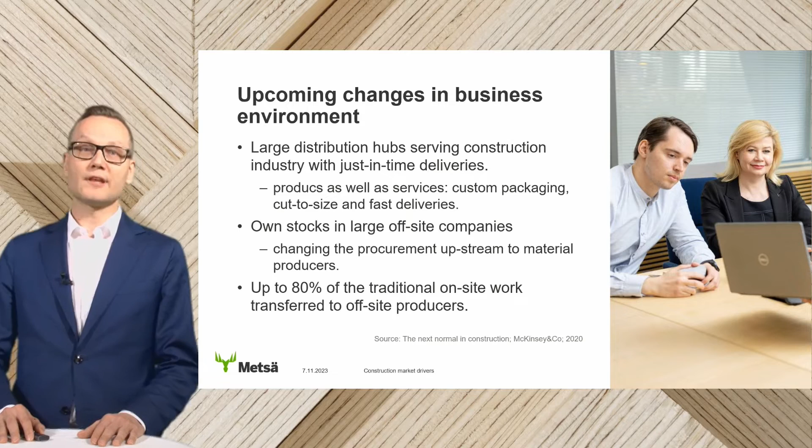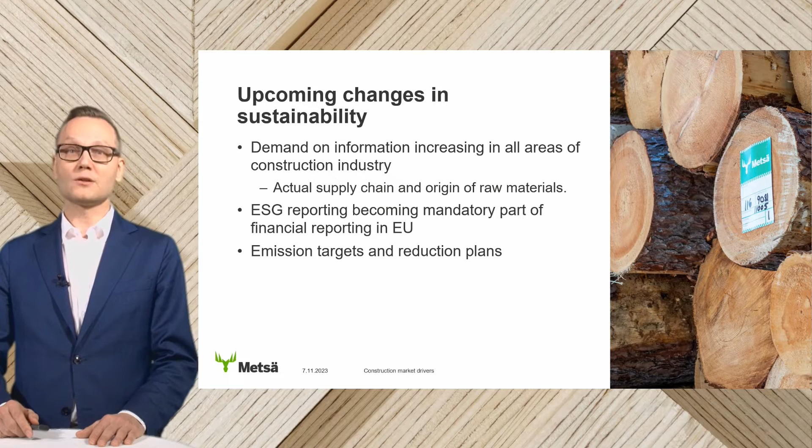The final topic, also visible on the market, is related to countries, municipalities, and companies setting emission targets, seeking to reduce their emissions. For example, I was at an event in Sweden where we discussed this topic, and the presenter said that depending on which year you start production, the limit of emissions per square meter is also decreasing or declining per year. So it's definitely something to keep a close eye on in the business front.

And I also know that my colleagues are presenting topics that help you look into this topic in more detail in today's event.

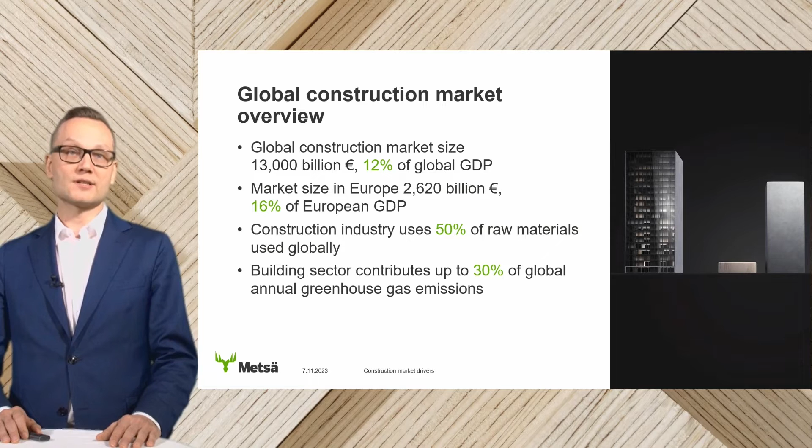And the final one here, which I want to take as a global comment, is related to greenhouse gas emissions. So construction industry contributes about one third of the global emissions, and again, that's a big amount. Of course, there are plans and targets to reduce this. Putting that in numbers, roughly two thirds of the emissions are related to heating, cooling and such energy usage, and one third is related to construction materials.

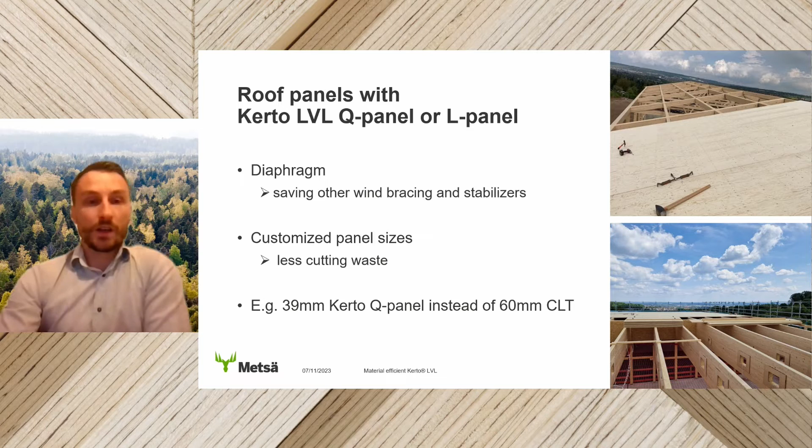On the one hand, saving, for example, wind bracing or stabilizers that you normally need, no matter if it's steel or glulam. Then, as I said, you have less cutting waste due to customized panel sizes. And thinking about using a Kerto Q or L panel instead of a thicker CLT, you might end up in this example with 39 millimeters compared to 60 millimeters CLT, with a material saving of 35%.

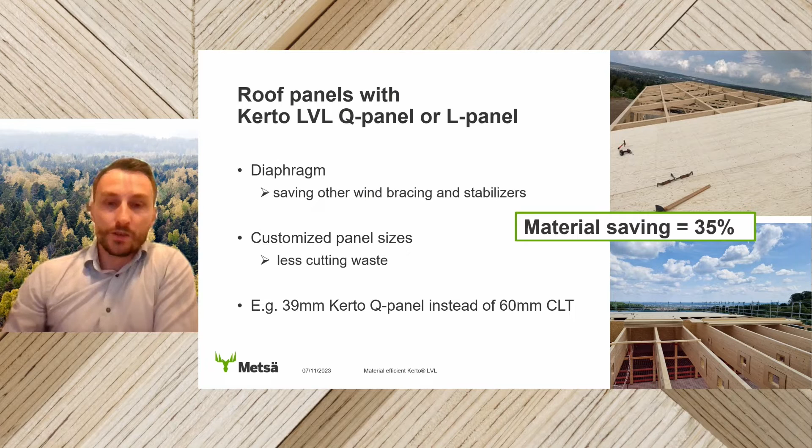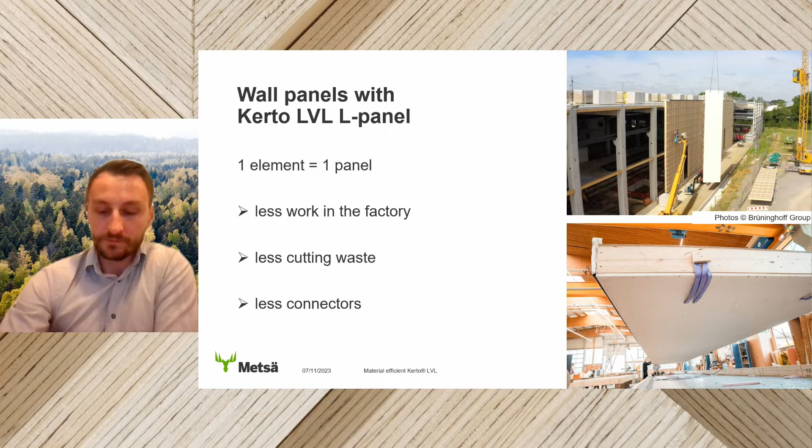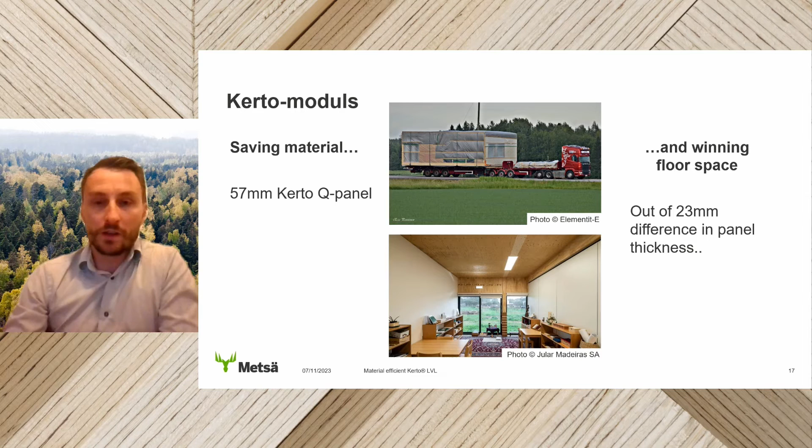Now going a bit more in detail with one example. Thinking about a Kerto module made of 57mm Kerto Q instead of an 80mm CLT, you're going to save 23mm on each side. So you not only save material, but the investor will also win some floor space, only 23mm per panel, but this could end in a significant amount.

On the one hand, you have a material saving of 29%, and on the other hand, assuming a module of, for example, 3 by 8 meters, you'll end up with roughly 1,500 euros added value per module, which might be a significant added value for the investor, depending on the sellable price and so on.

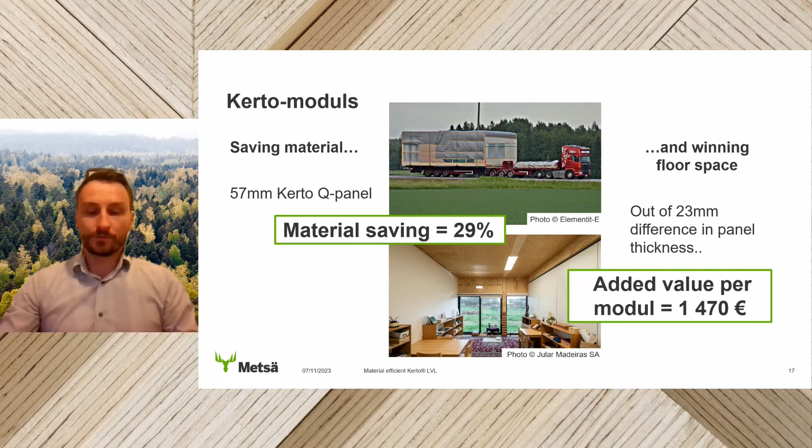So what about floors? Kerto can be used in floors in different ways. It can be used as a rib element, no matter if it's an open box element, a box element, or a rib element, the normal way and upside down. Or you can use it in combination with other materials like a glulam beam or something else.

We have the Kerto S-beams, 45mm wide, with Kerto Q panels on top and bottom, everything glued together, and Kerto Q panels of 45mm as well. So we ended up with 240mm in total as well, same height, same mechanical properties, and one big advantage regarding sound protection.

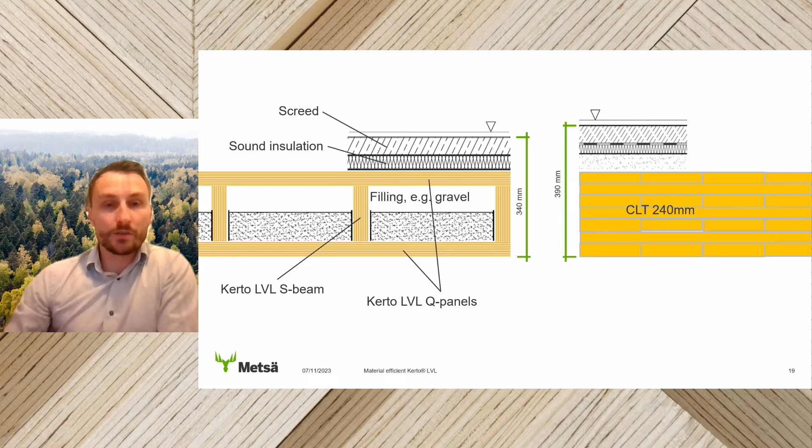So in this comparison, with 45mm Q panels and S-beams, this results in a material saving of 55%. It could be even more if we optimize the box element a bit more.

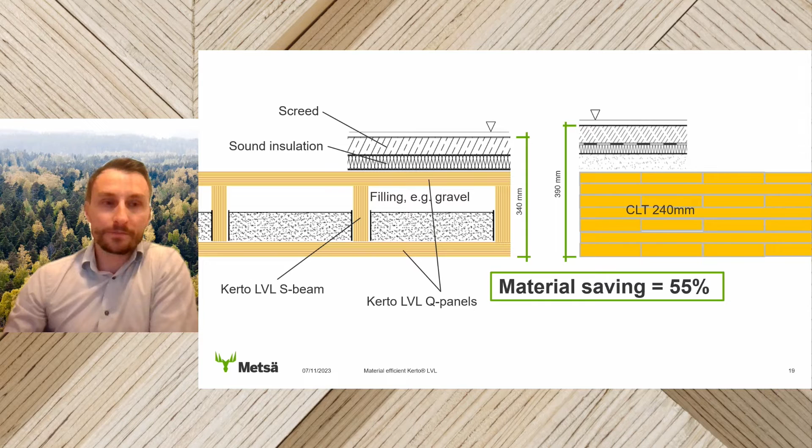So related to the floor, the connection to the wall is that lintel. I have a few examples here. But first starting with the most common solution, that massive one: we have a timber frame wall, we have a glulam beam on top as part of the bottom chord or upper chord, and then we put the timber floor on top of that timber frame wall, and on top of the timber floor is the next timber frame wall again.

This works in some applications, but often there are different questions regarding building physics, like what about the dew point, what about vapor barriers, thermal bridges, what about room high windows, what about settling, especially on higher buildings, or if you have a plastered outer wall. How is the load transfer going on? What about roller shutter boxes? And finally, what about resource efficiency?

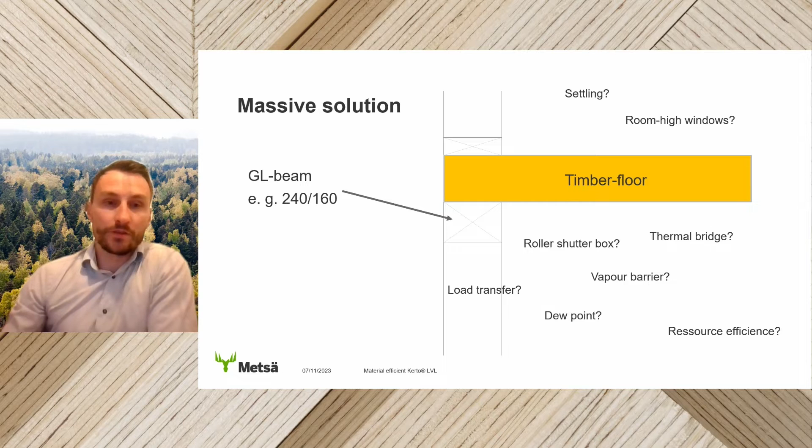So the big question is, why not use a Kerto LVL beam, like that clever guy from VVR does? It could be, for example, in 39, 45, 51mm, depending on the geometry of the wall and the structural requirements.

So here I will show you a couple of examples just to give you some inspiration how to use the Kerto beam without thinking too much about building physics, space in the wall for insulation, roller shutter box, and stuff like that.

So the first one is a simple beam, like you have it on the picture, and you can connect the beam shoe there, place your beams in the beam shoes, and it's done. Pretty simple.

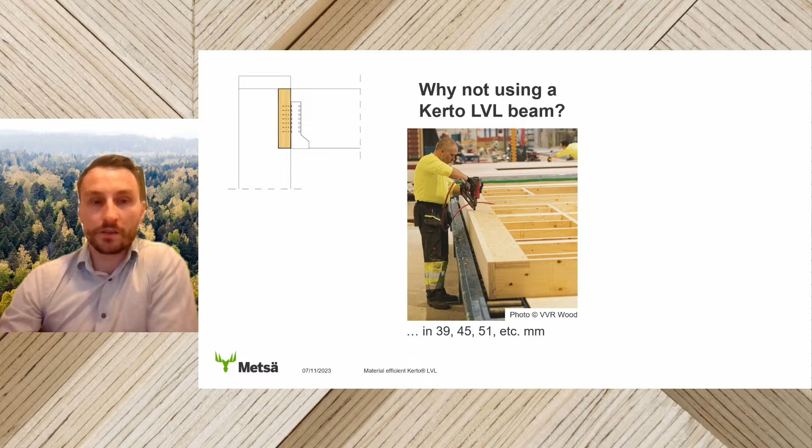The next one is a bit different. The idea here was to avoid cutting the studs, so we placed the Kerto beam in the installation layer, and that way we avoided the cutting. In this example, we used a metallic dovetail, so a Sherpa or HVP, you name it. This is an inspiration for this one.

Then the next one is that L detail, which maybe is known by you as well. Pretty simple to place the floor, and that's everything I want to say here. Sebastian will talk about that detail more in the next presentation. So pretty exciting what he's going to present.

Then last but not least, we have the normal dovetail connection. In this example, we thought about an element made of beams with one end beam, and the connection between the main beam and the end beam is with a dovetail. Then you screw that element to the beam that is implemented in the wall, so the lintel there.

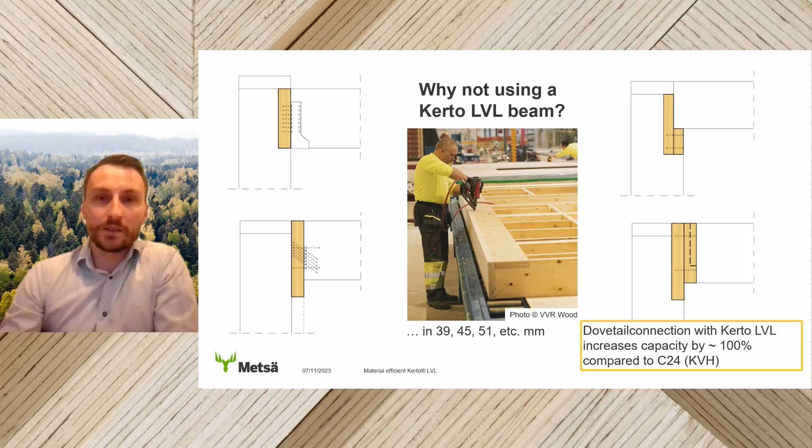What I find quite impressive as a side note is that comparing the capacity of C24 with Kerto LVL, you can double the capacity of the dovetail just by using Kerto. And comparing those now with the glulam beam I just showed before, so same mechanical properties again, just a bit thinner, you can end up with material savings of up to 65%, so 2/3 of the material just saved by this one, with a lot of advantages.

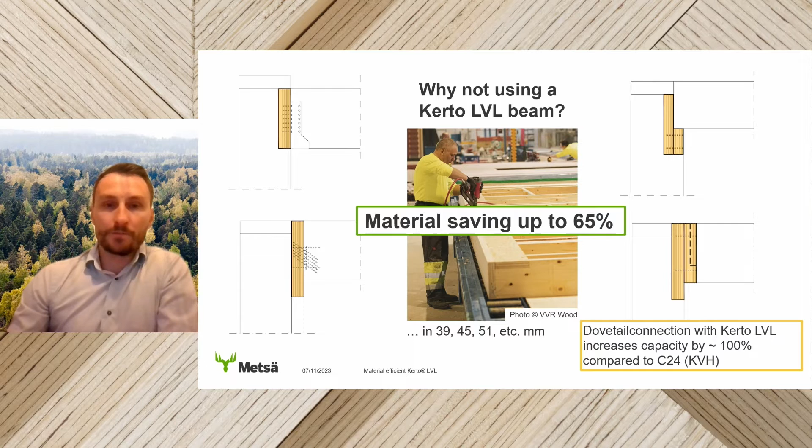So what about cut to length? That's one service we offer. Cut to length means we deliver the length you want to have. So if you want to have 3.58 meters or 8.20 meters or 11.12 meters, we will deliver this to you. So you don't need to cut it in your production facility. You can send it directly to the construction site, for example, or just use it in your prefabrication process.

And so we save material on two sides. On one side we save material in our production, because we have an endless production and we have almost no cutting waste in the production itself. And due to that cut to length delivery to your site, you will end up with no or very little cutting waste in the carpentry as well.

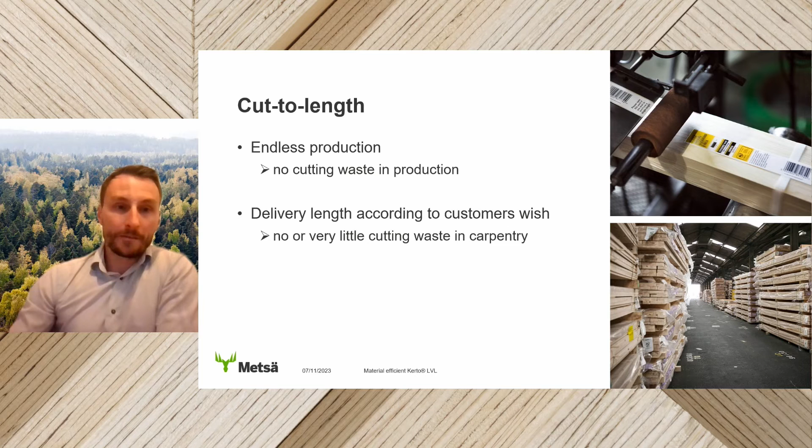So coming now to a quick summary of what I just showed you. On the one hand, you can save timber, like I've shown in some examples now, just by using thinner material, or using the material in a smarter, more efficient way. You can save supporting structure, like in that roof example. You can save connectors by using big size panels, so not tons of joints between the elements or between the panels, the cladding.

You save cutting waste, which might be, depending on the product, or if it's glulam or CLT or whatever, quickly 5, 10 or even more percent. And you avoid headaches about building physics. And finally, using big-sized panels in element production, you save a lot of work, of course, as well.

On the other hand, you will win space in the elements for insulation, roller shutter boxes, any other blind systems. You can win floor space, thinking about thinner walls, and with the size of the elements, you can win safety and speed on site and off site. So on site, especially thinking about closing the roof very quickly by using bigger elements, so less issues with rain or something like that.

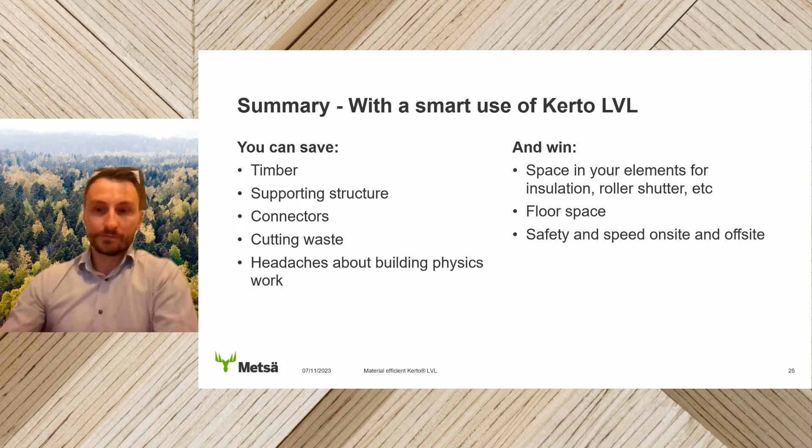A final word I want to say is, we're having a very, very precious material called wood, and I think it's very important for all of us that we don't waste it carelessly by using massive wood members just because it might be a bit easier in the beginning. So let's build more with less.

Thank you, Niels, especially for these last clever and inspiring words. I've been amazed by your presentation, especially the exceptional material saving in line with your last words - so up to 30, 50%, 65% in some cases.

Thank you for having very well spotted these material saving gains and benefits. We had a question in the chat about the standard dimensions. So for these lintels, are there any standard depth or height for these beams? The thickness you mentioned was about 45, 51, 57, but what about the height of the beam?

We have standard dimensions, not for the lintel itself. We have some standard dimensions that we offer on the stock, or from stock, and we have pre-dimensioning tables for the lintel. So both, we can offer to send them to you, whoever made that question or whoever asked.

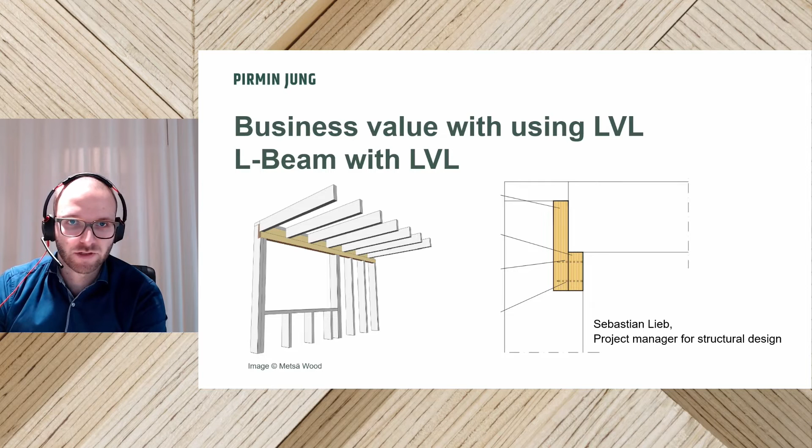So my name is Sebastian Lieb. I'm a skilled cabinet maker and timber engineer, and now I'm working as a timber construction engineer at Pirmin Jung in Switzerland. And as a project manager for structural design, I have already planned a wide range of buildings, from multi-story residential buildings to big structural halls.

Pirmin Jung itself is a planning office with several locations in Switzerland and Germany. We plan and accompany timber buildings in the areas of structural design, building physics, fire protection, sustainability, and reuse.

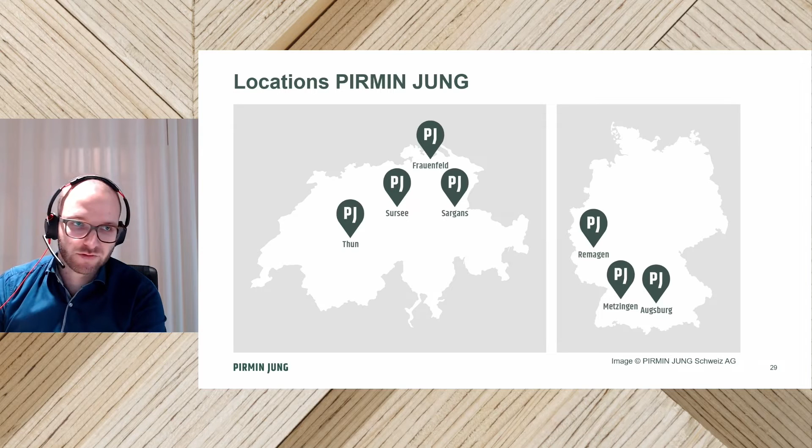First, I would like to show you some advantages of the L-beam detail.

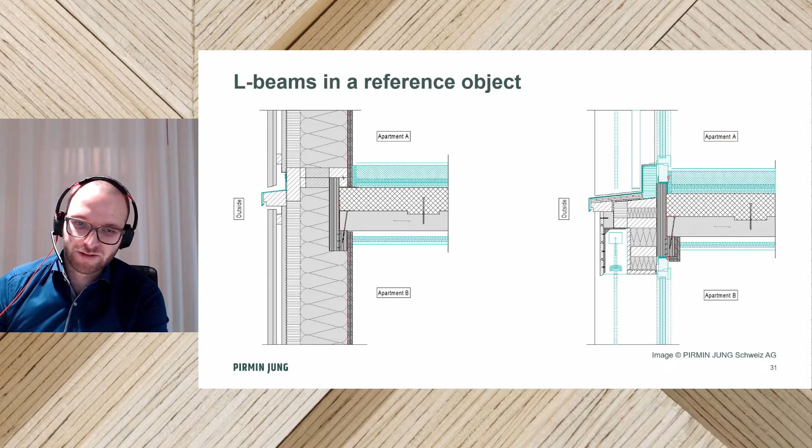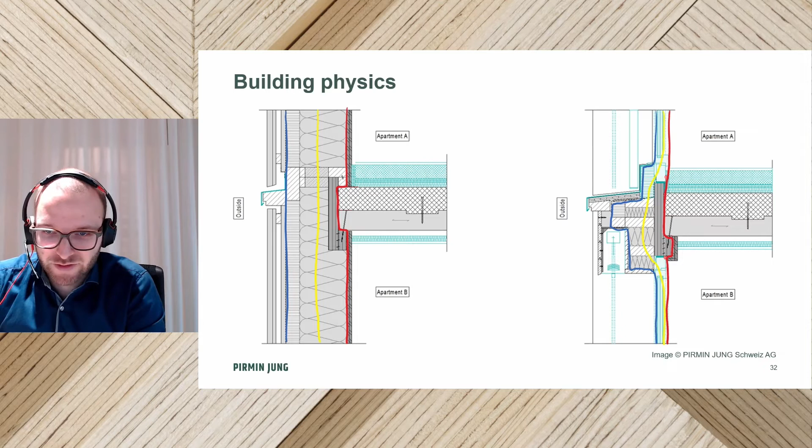Depending on the wall thickness, the roller shutter box can be integrated relatively easily in the wall. Depending on the window position and the architectural wishes, the position in the wall can shift, as you see in these two examples above. The lintel height above the window can also be significantly reduced compared to a conventional beam.

Of course, the beam height depends on the span and the load from the ceiling. The size of the L-beam therefore varies depending on the project. With these measures, the architectural wishes can usually be taken into account.

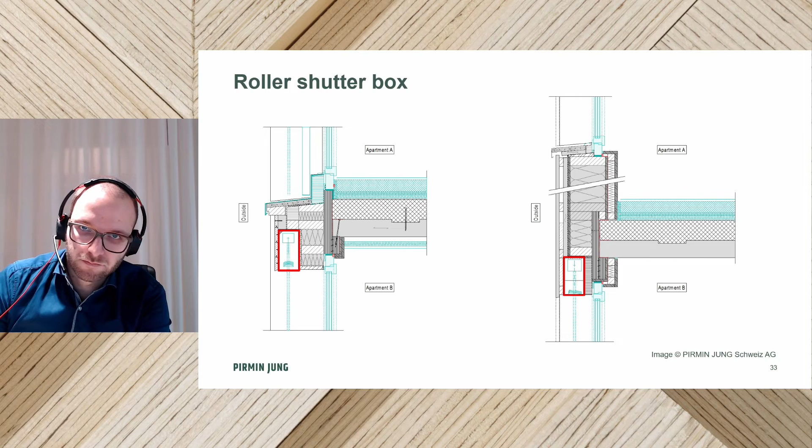When an L-beam is installed, the column only needs to be notched locally. This helps the columns to be placed on top of each other with a pin. The columns stand directly on top of each other, and cross-wood can be reduced with this system.

Reducing cross-wood is particularly important for tall buildings in order to reduce settlements.

The load from the L-beam can be transferred into the column via contact. The high strength of Kerto helps to reduce the width of the supports. Since Kerto also contains transverse layers, it is the optimal material to withstand the transverse pull in the web and the L-beam.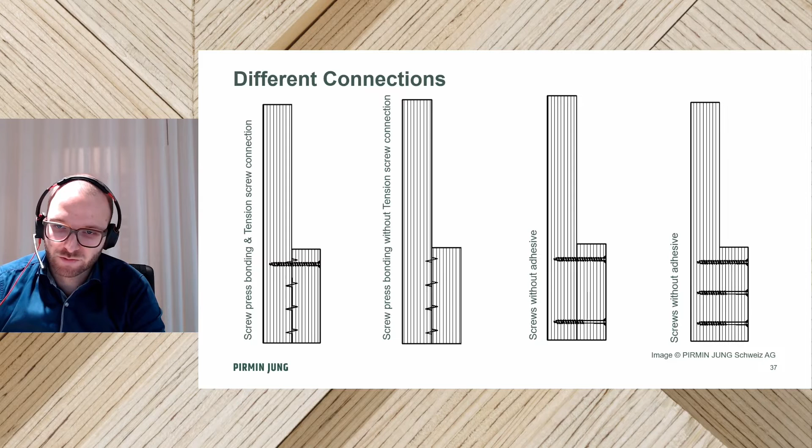In the second series of tests, we omitted the cross tension screws and only connected with screw press adhesive. In the last two series, on the right side, we connected the web and the bar with a different number of screws without any glue.

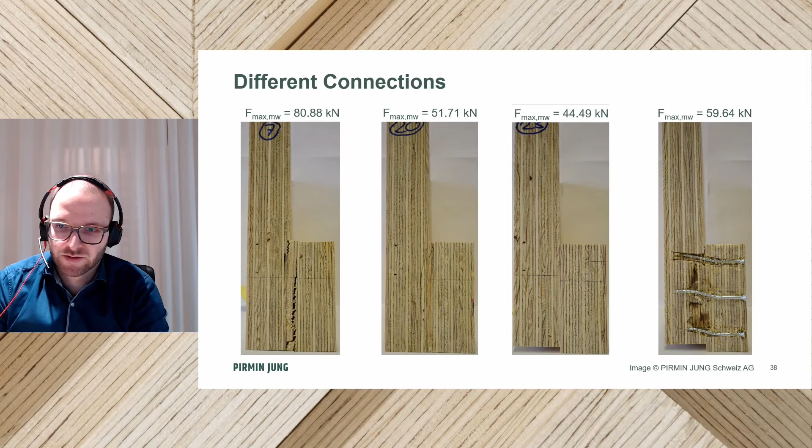The test specimens were driven until they broke. You can see the results in the four pictures. The beam with screw press bonding and transverse tension screws delivered very high strength values and failed in the wood cross sections. The second beam with screw press bonding and without transverse tension screws failed in the joint due to transverse tension and achieved significantly lower strength values. The screwed L-beams on the right hand side also took a significantly lower load, resulting in large deformation between the web and the bar.

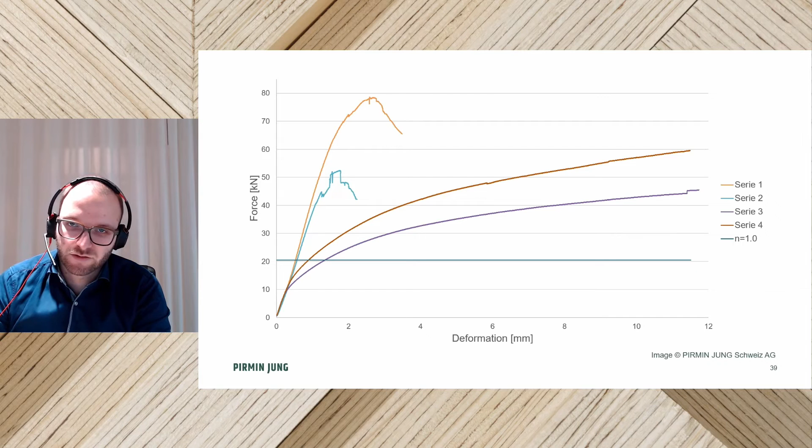I can explain to you why the transverse tension reinforcement has such a big influence with the following pictures. With our L-beam, the support force acts eccentrically on the beam, which results in an offset moment on the beam.

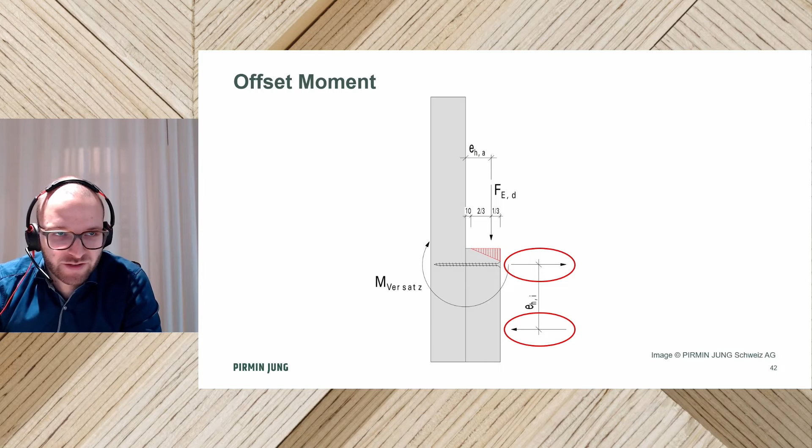The displacement moment can be divided into tensile and compressive forces. Since wood cannot absorb large transverse forces, the tensile force must be reinforced in the cross section with fully threaded screws in the upper part of the support bar.

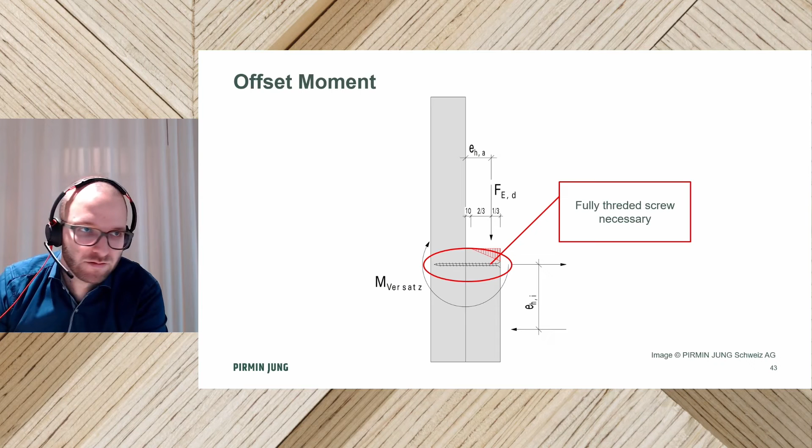In Switzerland, we usually use press bonding with fully threaded screws in our L-beams to achieve the maximum strength. In Germany, not every woodworker can carry out screw press bonding, so sometimes only screws are used in this L detail, but then the additional deformation must be taken into account in the structural concept.

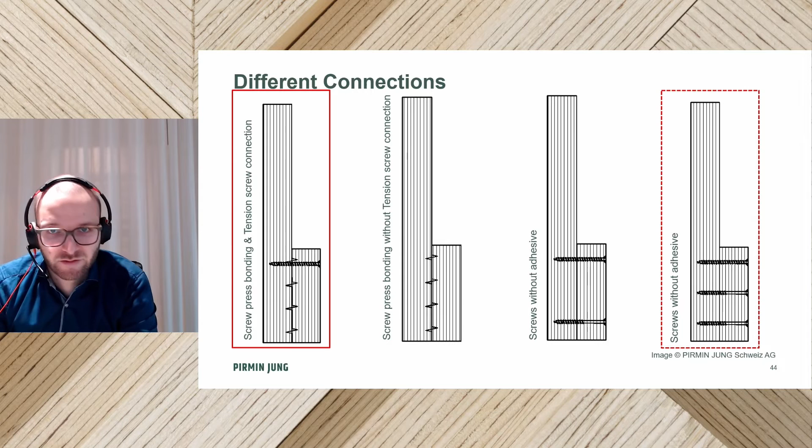Test results before showed that an L-beam without transverse tension reinforcement is not recommended from our side. In summary, the L-beam helps us create a slim and efficient load-bearing structure and meet the high requirements in modern buildings. With Kerto Q, we have the optimal material to create these L-beams.

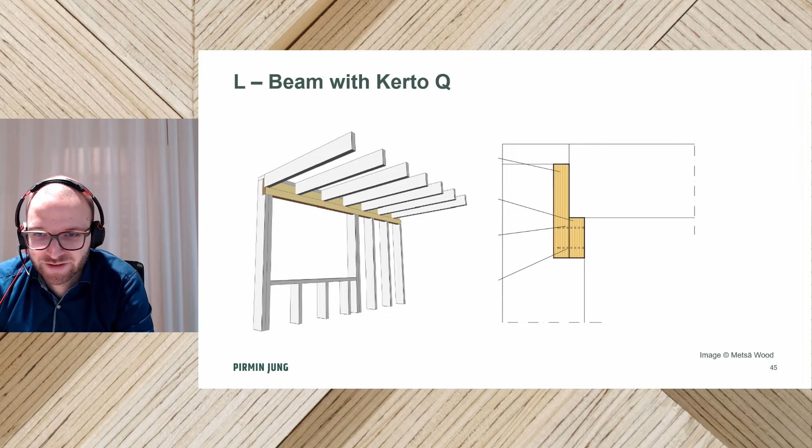I hope you were able to take some new aspects away from this presentation, and thank you for your attention.

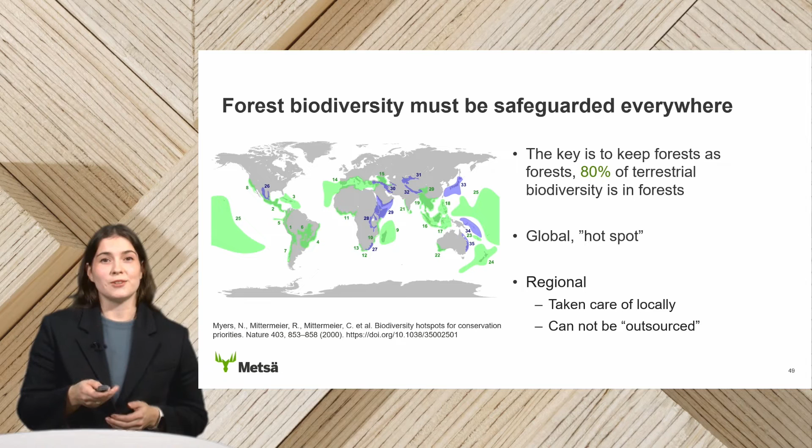Coming to the local level, what does this mean for our northern forests? Here in the Nordics too, the warming climate is increasing the risk of forest damages, such as forest fires and windstorms. This is already creating a risk to raw material availability.

But the warming climate can also be a benefit for the northern forests, as we get a longer growing time for trees within a year in the Nordics. So when we take care that the forests stay diverse, they also stay more resilient and adaptable to climate warming, and it even gives us a chance to take advantage of this warming.

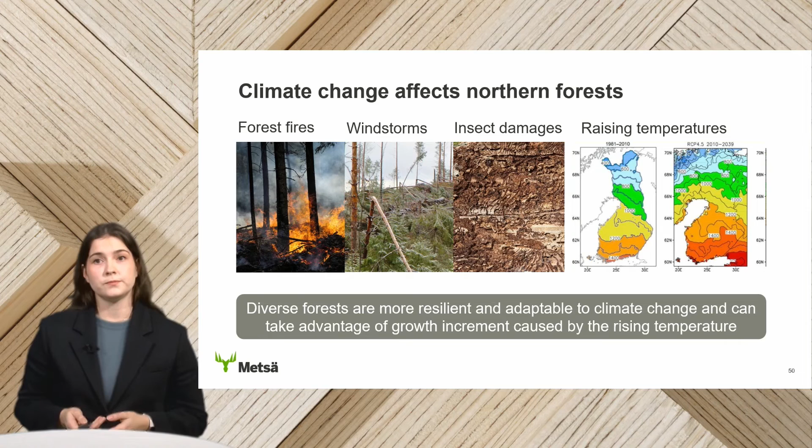Then, looking a bit at the legislative perspective and what Metsä Group is doing: in Europe, climate and biodiversity are already taken into account on both EU and national level. For instance, in the Nordic countries, a law already sets a minimum requirement where you have to plant new trees in the forest when trees are cut.

On top of these, for instance in Finland, we have best practices for sustainable forest management, which are based on the most recent scientific knowledge and social values. On top of these national level requirements, we have global voluntary forest certification schemes such as PEFC and FSC, which set the requirements for sustainable and responsible forest management that also meet international standards.

But we can do actions that go in addition to the forest certification schemes. For instance, at Metsä Group we have our ecological sustainability program, which is basically a program to put into practice our goal of regenerative forestry. By regenerative forestry, we mean that we leave the forests in commercial use in better condition for the next generation compared to what they were before.

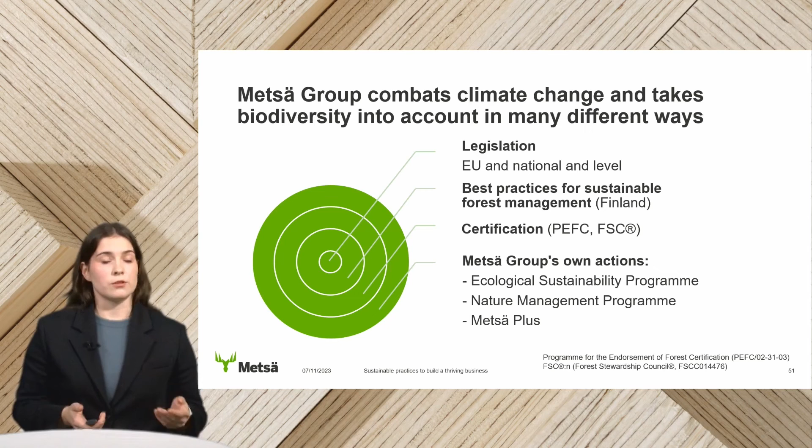On top of these programs, we have our Metsä Plus model, designed as a compensation model for our owner members. We are owned by Finnish forest owners, and we purchase our wood from them. So when a forest owner decides to make additional biodiversity actions that go beyond the certification, we give extra compensation for those actions.

Then how does the everyday forestry in Metsä Group, when putting into practice this ecological sustainability program, actually look like?

When replanting the trees, we only use native species, and again here we create diversity within the forest by not planting just one tree species, but two or three.

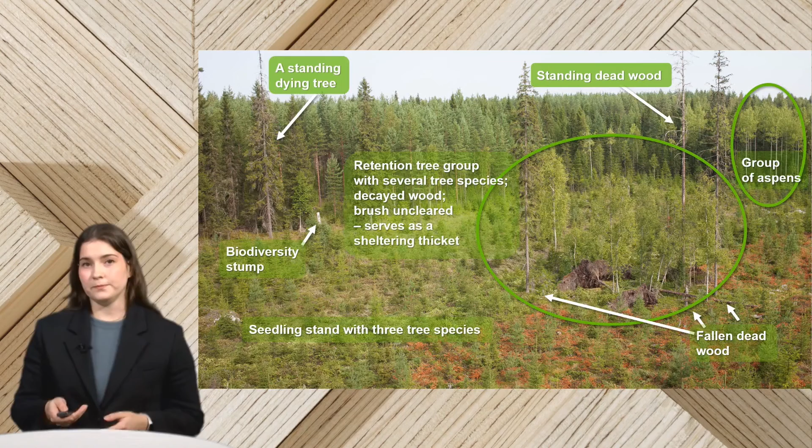When sourcing our wood, we always make sure that no matter whether it's coming from a certified or non-certified source, it is traceable and coming from legal and responsible sources. All our mills are chain of custody certified, which enables us to trace the wood supply chain, and these procurement principles are the same in all our wood sourcing areas.

Then a bit about forest certification. Forest certification guarantees that the forest has been used legally and managed sustainably and responsibly. On a global perspective, around 10% of forests are certified, and in comparison around 90% of the wood that Metsä Group uses is certified.

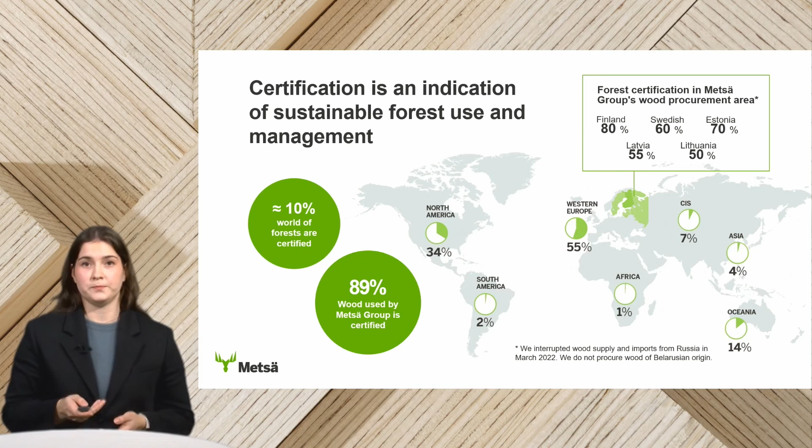Then what does forest certification and chain of custody certification mean? First, we have a forest owner who decides whether they want to certify their forest or not, and that becomes the certified forest.

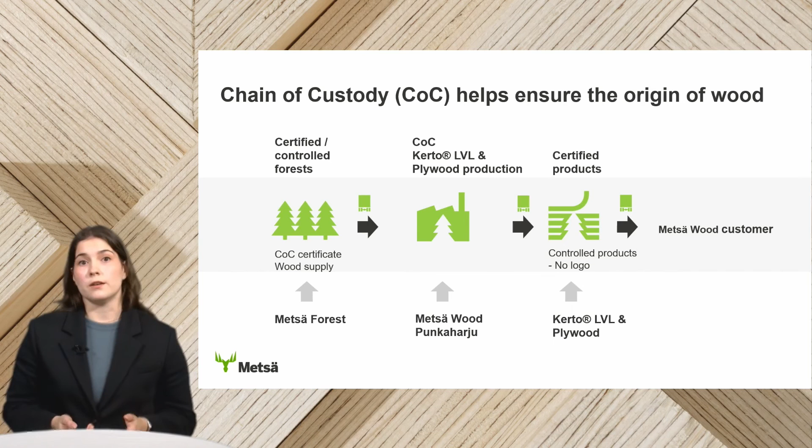Then, for instance, our sister company Metsä Forest supplies the wood from the forest owner, and the wood comes to, for instance, the Metsä Wood Punkaharju mill, which has the chain of custody certificate. This means we can track the origin and are able to sell certified products forward to our customers.

Summarizing a bit, it is important that forests remain forest and are in good condition due to climate change and biodiversity concerns. When purchasing wood material and doing it responsibly, here are a couple of things to focus on.

First, prefer forest certification and chain of custody certificates, and remember to check the supplier's certificate — that it's valid and check the scope of the certificate, so the product and mill you are procuring from are included. Also pay extra attention to the country of origin, and you can always ask the supplier about any additional actions besides the certificates.

Moving on to our sustainability service. First of all, if there's any need for sustainability support, or you just want to have a general discussion about sustainability topics, please contact your Metsä Wood sales contact person and ask them to arrange a meeting.

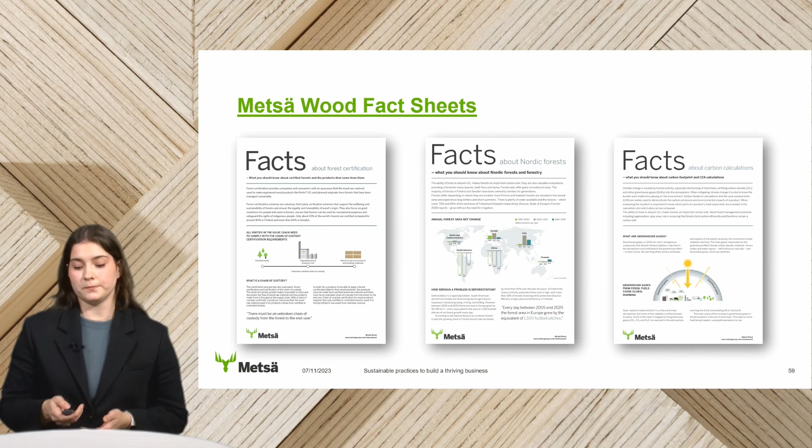Also publicly available for all, we have all our mills' management system certificates, and then also our chain of custody certificates available. So when I mentioned that you should check the validity and scope of the chain of custody certificate, that's where, from our website, you can go and check.

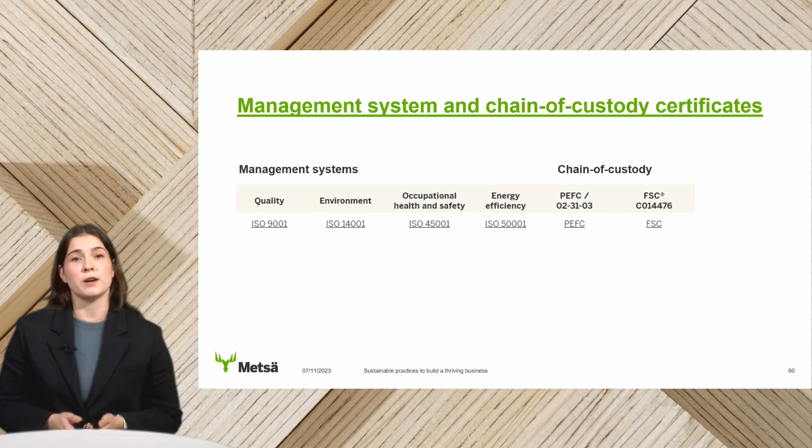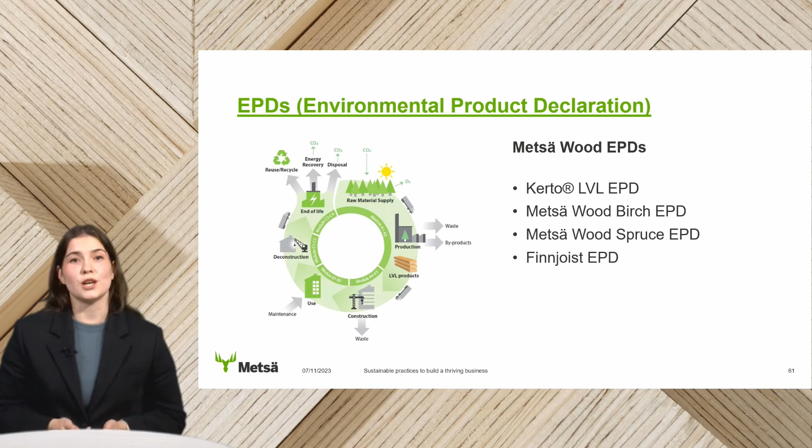Thank you for your time.